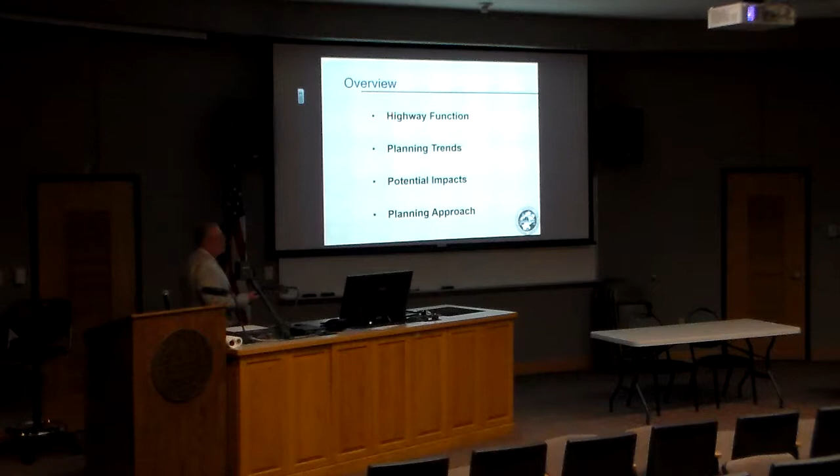What I'd like to talk about tonight is just a little bit of an overview of some of the things that affect highway corridors. I'm focused a little bit more on commercial highway corridors. But I'd like to talk about highway function. That's the functional classification of the highway system.

I want to talk about some of the recent planning trends, some of the trends with dealing with transportation corridors, some of the potential impacts about decisions you might make when you're doing a site plan or a subdivision project, and planning approaches to, I guess, ameliorate or mitigate some of those effects.

So, before I start, I just want to mention the comprehensive plan. A lot of people have done one in their communities, and I want to focus on two of the aspects of what would normally be in a comprehensive plan, that's transportation and land use. Now, a lot of times when people talk to me about a comprehensive plan or they want to do one, they focus on economic development. And my answer to that is usually that all of those items are economic development.

They all interrelate. That's one of the things I like about comprehensive plans: they're so complex and there are so many different aspects that feed into the final document. It's really a policy document in the end. And there may be some design guidelines and things included, but it's a pretty interesting process to go through.

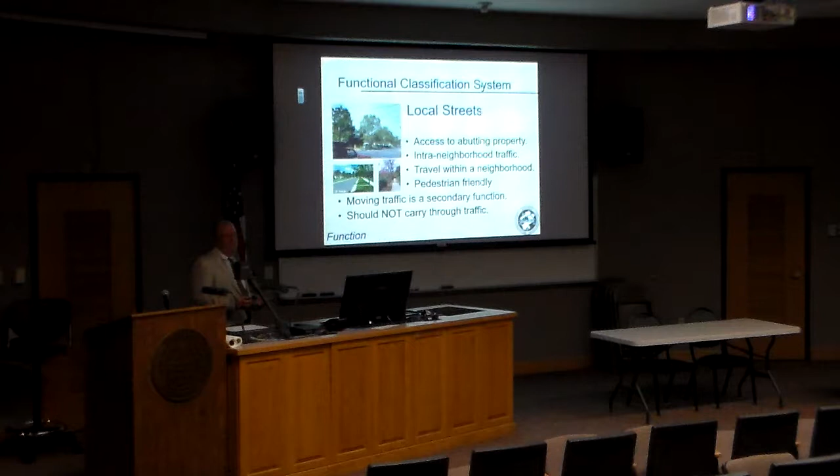Local roads normally should not carry through traffic. I know some communities have to put through traffic because they have issues where they need to reroute traffic through a neighborhood, maybe temporary, maybe permanent, and maybe what they call a stopgap until they can actually get some corrections made to other highways.

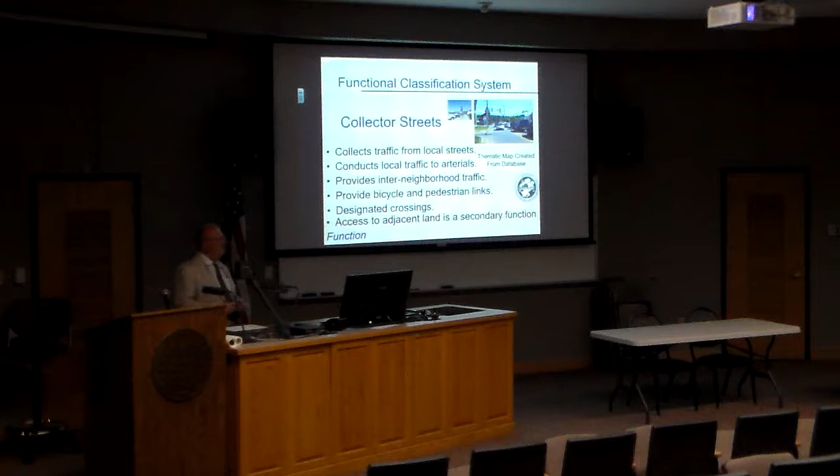A collector road basically collects the traffic from the local streets or your neighborhoods, and it conducts it to the arterial highway system. It provides connections between neighborhoods, and it really is the type of highway where you want to improve pedestrian links, pedestrian connections, and have well-planned pedestrian crossings, because it is a higher speed highway. It does carry higher volumes. The pedestrianization is compatible with it, and it actually provides that interconnection throughout the community that you want. So access to adjacent land is a secondary function in that case.

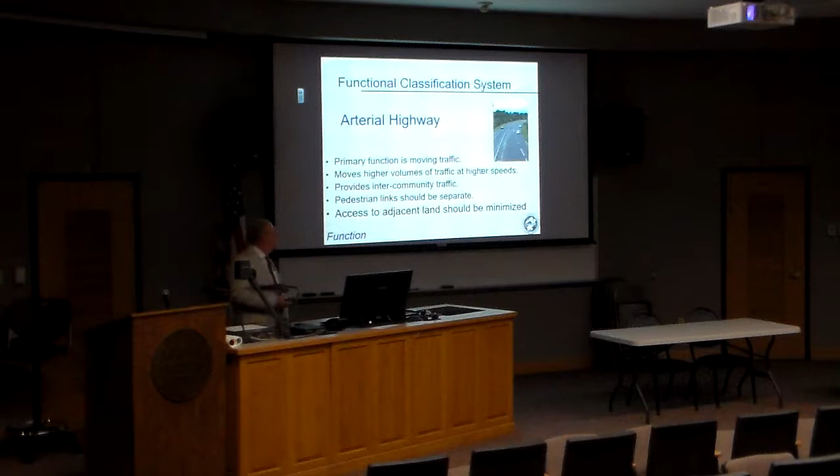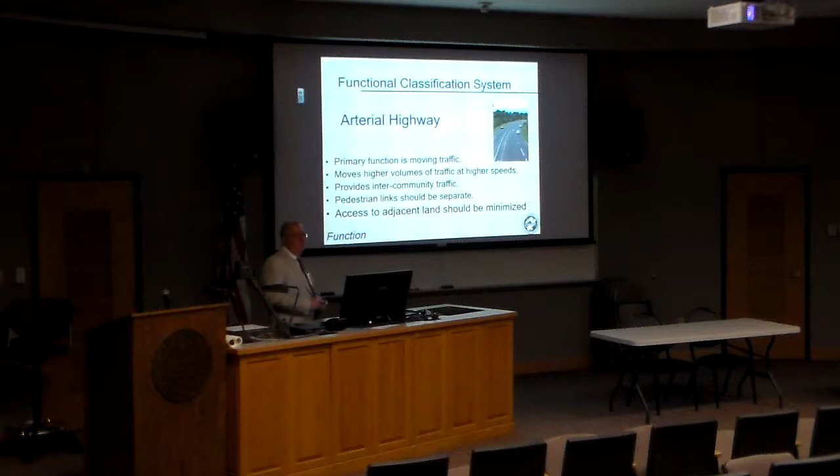An arterial highway is a higher volume highway. Its primary function is to move traffic. It moves higher volumes of traffic at higher speeds. It provides intercommunity traffic between towns and villages and cities. Pedestrian links should be separate to a degree. They can be in the margin. I know Oneida County's got the Canalway Trail system in an arterial highway, and it works very well because of the spacing and the amount of margin that they have and some of the design elements they put along the trail system. Access to adjacent land on arterials should be minimized. You don't want driveways spaced 100 feet apart.

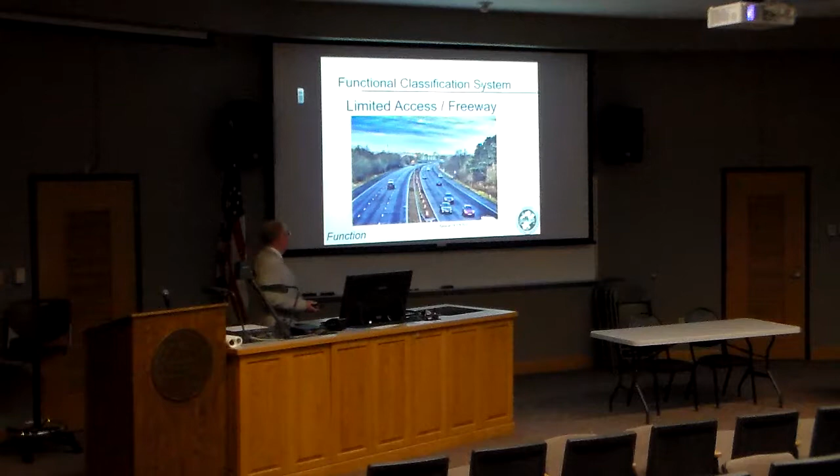Then there's the limited access freeway, which is I-81. Limited access meaning they're not going to give you an off-ramp with access to adjoining land unless you have a really good reason for it, and 90% of the time DOT won't give you an access ramp.

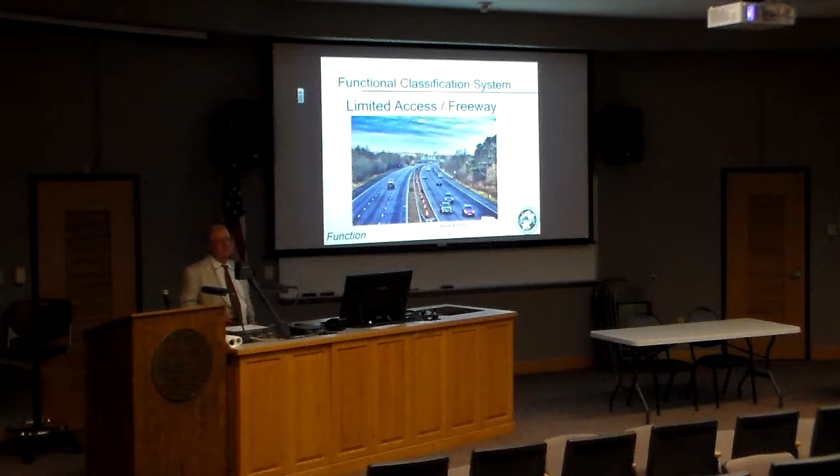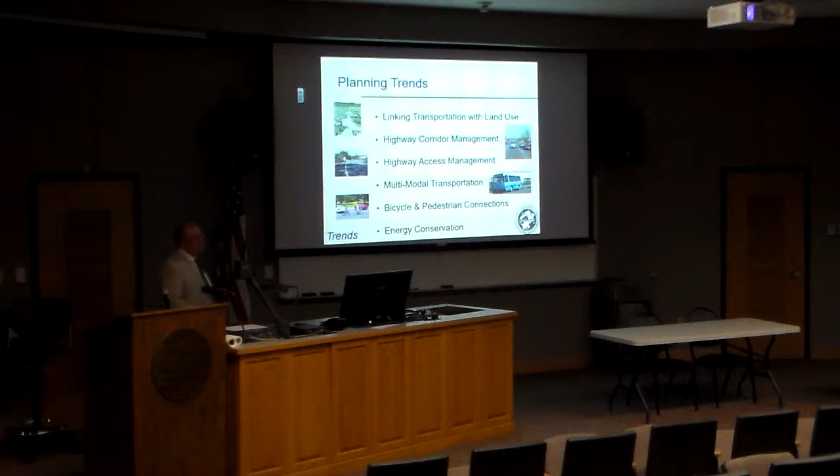Multimodal transportation. I mean, people now are looking at transportation plans in an integrated way that includes bicycle and pedestrian connections and bus stops. And energy conservation is another big one. They're trying to get people out of their cars, on their bicycles, on their feet, trying to make people exercise more, drive less, and conserve more energy.

So these are just a couple of examples of what some of the other communities are doing to try to reduce or maintain some of this, oh my God, there's a bus coming at me and I just stepped out the street, I just want to go to the store. This is a community in Ohio, I think this might be in Columbus. I've been to one in Bainbridge, Ohio. And this was one of the conceptual plans. This has actually been built.

And I was to one similar to this in Ohio and a couple in Pennsylvania. And they really work well. They look like little villages. And sometimes they're new community style, where they actually built it from the ground up. And sometimes, in this case, this was a downtown that has been retrofitted, make it more pedestrian friendly, make it more like a park, calming the traffic down, using different textures in the pavement, dressing up the facades.

Actually, this could be public square right there. It's pretty similar in a lot of ways, and their approach was pretty similar to what I think a lot of people in Watertown are thinking. This is just another example. These are restaurants, and I think there's a theater in one of these buildings.

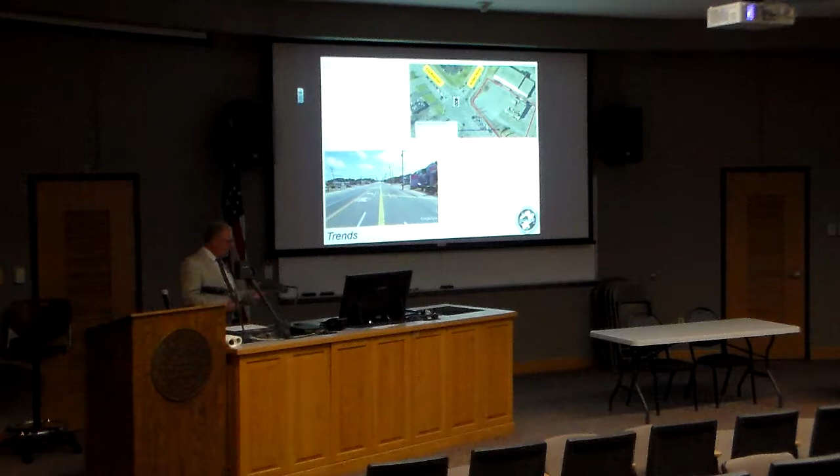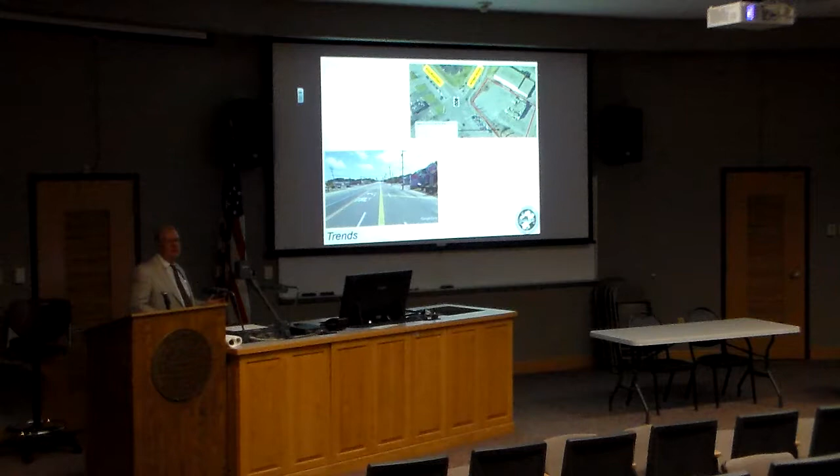We're thinking ahead generations to try to recover from some of the things we've done for what I call vehicle-centric communities. Sometimes it gets to a point where we realize we've got to do something. And just a few amendments or adjustments to their site plan review process, some policies, really at the time it starts to work.

So, this town center theory now that has become popular, we start planning for like a movie theater or outparcel development, when a new apartment complex comes in, a hotel facility, regional attractions. These could be in a town center, or this could be an individual proposal that comes in for site plan review. And one of the things you got to think about when you're doing the site plans, you can't just focus on that site plan. You have to think about what are the impacts off-site.

I don't want to get into a generic environmental impact statement, but a lot of times a proposal will come in. Back in the 90s, I came in about halfway through it, but I was involved in the Oneida Nation Casino. Nobody believed that a 40-story building would be built where it is, and nobody really understood what was going to happen around it. They didn't really have any zoning to deal with it. They didn't have a comprehensive plan. They weren't sure what to expect.

So when you're doing site plans, particularly on commercial corridors, you got to think about this, what I call spin-off development. You get an office park that's been approved, and you've gone through the process of doing an environmental impact statement, and you know that, geez, we want a shovel-ready site because this has been cleared environmentally for an office park. And you have one office comes in and you approve it. Second office comes in, you approve it. Third comes in, you approve it, and it all meets the criteria you want.

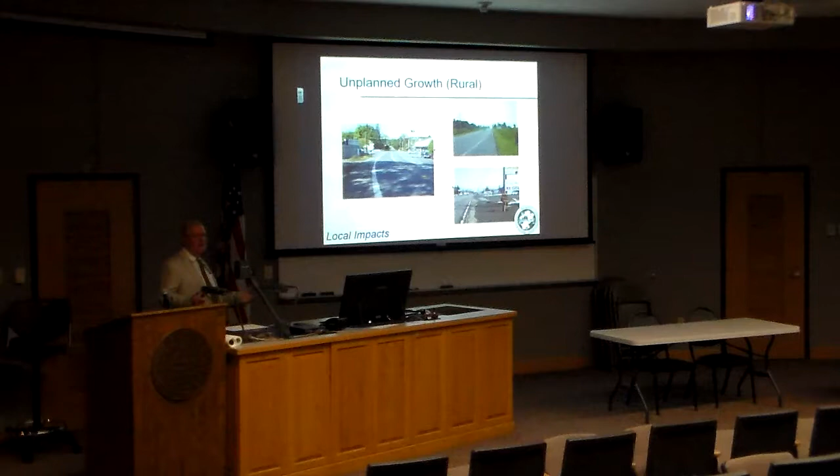When you're driving down this highway at 45 or 50 miles an hour, you have no idea where somebody's going to come from. Hopefully you can see them, but there's no defined place for you to expect people to pull onto the highway and pull off of the highway. So, unplanned growth, that pops up. That's just an example of a highway, I think this is west of Philadelphia. Can't remember the name of the town. This is ultimately how it will grow if it's not managed.

And I can't get back to the other slide for some reason. It's not letting me do it. Lost it.

So, here's another example. You've got cars pulling all over the curb to park along this building. It's an older building, it's probably been retrofitted to a bookstore. There might be a convenience store on the corner here, but people are backing into an intersection here. A lot of these things have happened over the past and we didn't realize it, but now it's time to start addressing issues like this, especially in rural communities where they've never had a problem before, but now people have 2 and 3 cars, whereas before maybe they had 1.

I talked a little bit about how traffic can affect the economy. This is a study that was done by DOT. I believe it was in Manlius, New York. It was done about 15 years ago. One of the things they looked at was that if people are parked in front of your driveway, they're not likely to make a turn into your driveway, especially if they know they have to make a left turn to get out and wait for people who are waiting for a light.

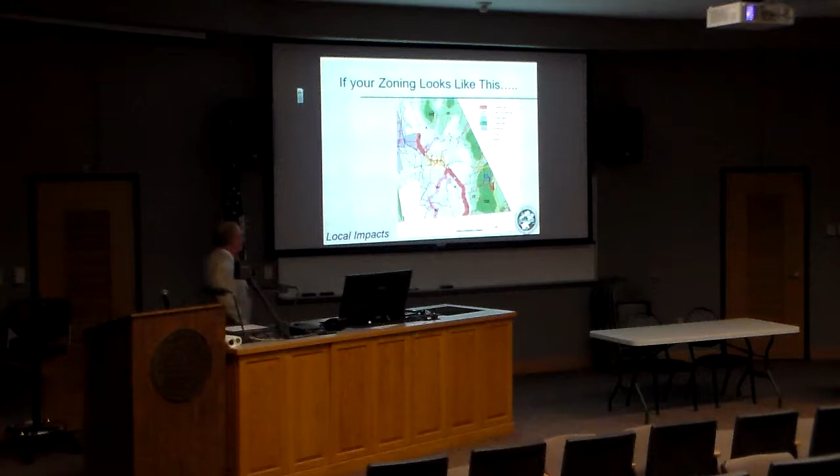So, we went through a process of explaining this and going through public meetings and hearing everybody's opinion. And, basically, if your zoning looks like that, that's what your commercial corridor is going to look like without the proper planning. I actually thought this was Route 509, but this is also in Maine. This is that commercial strip on the map.

Would you have any idea how long it took for that thought process to occur before decisions got made? The example I just gave you about PDD? Yes. We really fast-tracked it. I'll tell you, the approach we took was very unique. We gave them a proposal to do a corridor study as a lead into a comprehensive plan. And this was to who, the town or the municipality? This was the municipality. It was a township, a fairly rural township. It took us about 2 years to get through the comprehensive plan.

We sent out a survey, a fairly large survey, much larger than I wanted to send out, but the zoning commission was actually in charge of the comprehensive plan. I think it ended up being something like 50 questions. And we couldn't believe the response we got. And it turned out that the majority of people didn't want this. And there were a couple of people at the meeting that said, the other side of town is successful because of this. There were 3, 4, 5 people that were very outspoken. And after a while, everybody just said, nah, you're wrong. That's not the way we should be going.

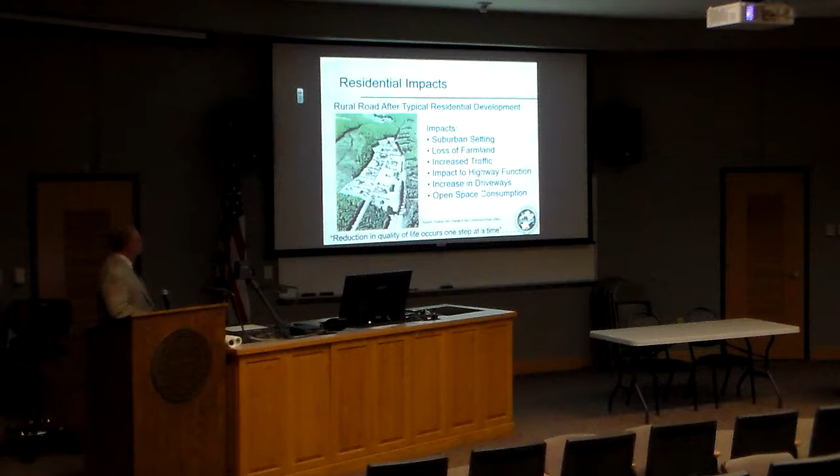People aren't as distracted. When drivers are driving down a highway with signs, cars, trucks pulling in and pulling out, the driver's no longer worried about bicycle and pedestrians. He's worried about the next car that's going to pull out in front of him. And he's got all these signs and lights and directional signs that are distracting him. He's basically holding on to the steering wheel, watching out for the next car. So that's not really a pedestrian environment.